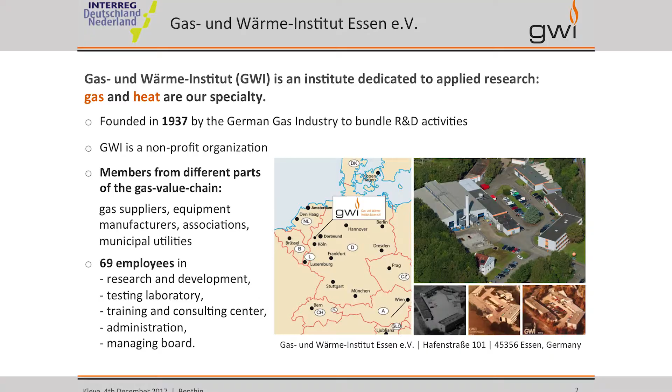Research, I am part of this department, as you can imagine. And the test laboratory is testing for certification for the German market for gas applications. And the education department is teaching people who are dealing with gas or gas-related technologies, so that they know about safety issues and how to handle them, etc.

We have a lot of members from the industry. A few very big ones you probably know, like E.ON or Viessmann or Weishaupt, and a few distribution grid operators, and so on. And of course, we also have partners in the research field, so it's called a research network. And you will see a lot of known names like PTJ or Fraunhofer UMSICHT or Duisburg-Essen, the university, and so on. I will show you a few current projects of the GWI so that you will have a general idea in which fields we are working at the moment.

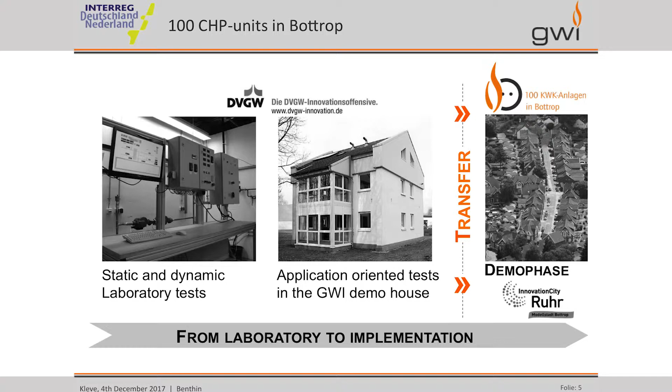One very big project we had in the past was the project 100 CHP units in Bottrop. We installed 100 CHP units in Bottrop in normal residential buildings, or more or less residential and service buildings like kindergartens or small department buildings. All these buildings got an energy monitoring system, so that we get data every 5 minutes from the energy production and consumption. And energy means, in that case, electricity and gas.

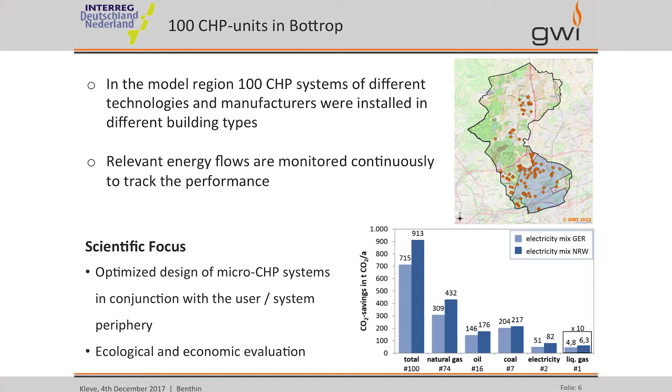We got a lot of data out of this project, and we compared the new version with the old version, so a gas boiler or oil boiler with the new CHP systems. And we showed the amount of CO2 which could be saved using these kinds of technologies. The CHP technologies we used were fuel cells, Stirling engines, and Otto engines. So we used a range of CHP units.

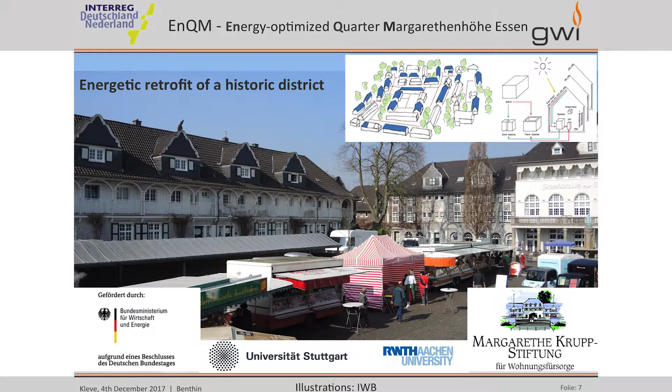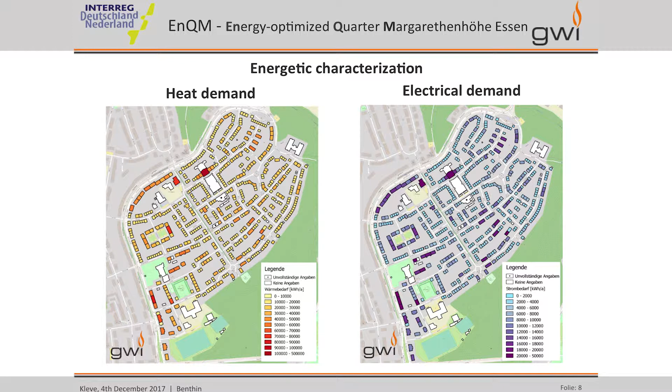Another project, funded by the BMWi, the German Ministry of Economy and Energy, is the project ENQM, Energy Optimized Quarter Margarethenhöhe Essen, which is a historically protected district in Essen, where we show several technologies to retrofit these buildings because they are protected. And we're building up a model for the whole quarter to simulate it, to present the different approaches, not only on the building level, but on the district level.

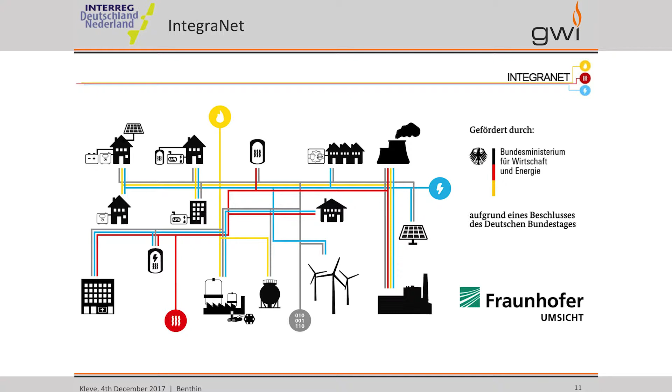In Work Package 1, we are testing several technologies in our demo building. As you can see, we have a multi-family house at our site, a real multi-family house where we can install several technologies which are used in residential buildings. The building is equipped with an energy monitoring system, so we can test the system in a realistic environment. And then we also have test rigs where we can measure precisely the efficiency and so on.

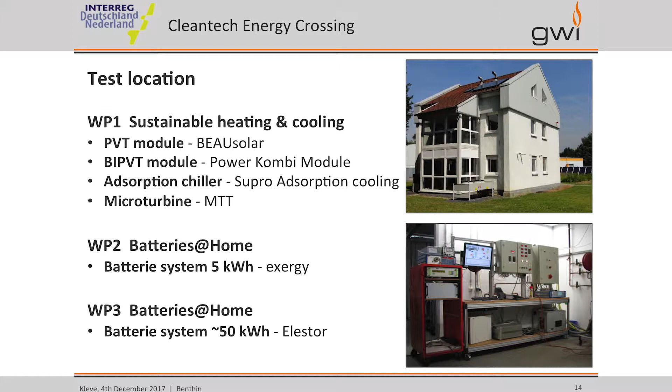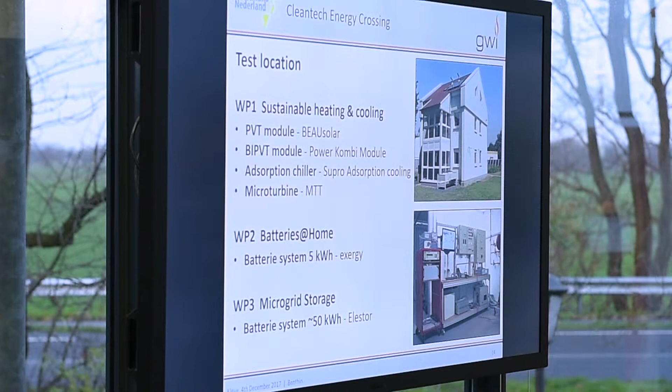In Work Package 2, we are going to test a battery system in one of our test rigs or in the demo building, we will see. And we are providing the project with real data from buildings, which means load profiles for electricity and load profiles for heat demand in minute steps, I think we agreed on that.

In Work Package 3, we will also provide the project with a test environment for the bigger electricity storages on our site, because we are building up a so-called smart microgrid on our test site. We have electrolyzers, we have fuel cells, we will have PV next year, I think. And we have different CHP units with different sizes. All these systems are connected with each other, and we have the measurement systems and the data acquisition to show the whole system.

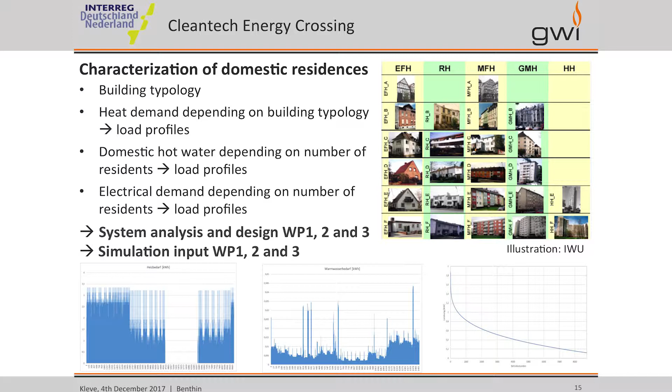And this is a small overview of the things we are providing the project. On the lower side, you can see the load profiles. And on the right side, this is an overview of German building types, with different energy consumption levels and so on. And in the end, we will simulate the different systems in interaction and integration in the different kinds of residential environments and districts. Simulation, what does it mean?

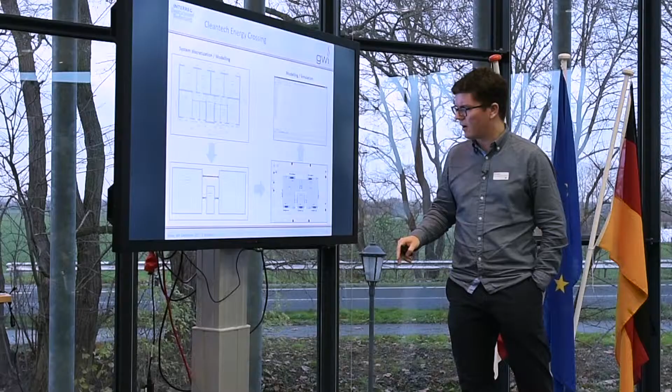We will take the real buildings and start to discretize and model them, and then in the end we will have a simplified model of the building. This, for example, is one floor of a multi-family house. This is the floor, the stairway, and these are two flats, and we simplified the realistic one. You can see this is one flat with several rooms, but we simplified it so that each flat is one room with an average temperature which is set by the behavior of the people who live there.

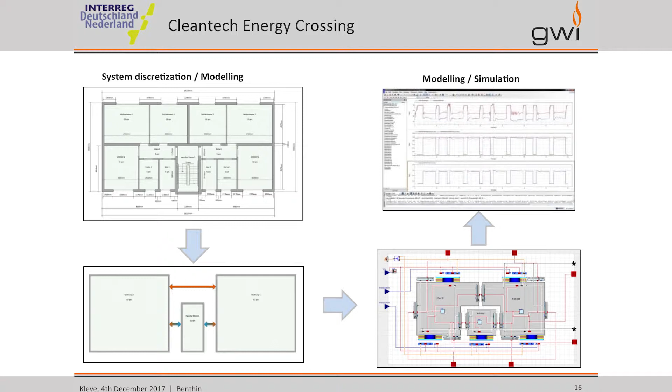I tried to do it in a short way. And that was an overview from myself, and thank you very much.